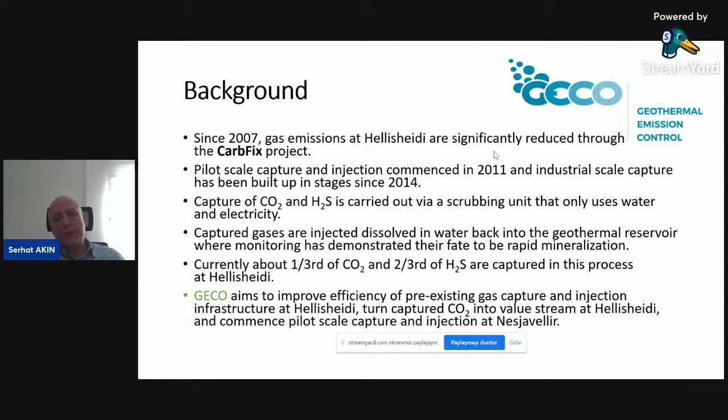The GECO project aims to improve the efficiency of this pre-existing gas capture and injection infrastructure at Hellisheiði, turn captured carbon dioxide into a value stream at Hellisheiði, and commence pilot scale capture and injection at Nesjavellir power plant. As part of GECO, we aim to expand this process to different types of geothermal reservoirs, and the demo sites established, apart from Hellisheiði and Nesjavellir in Iceland...

...include Hveragerði, Kızıldere, and Bochum reservoirs, which are going to be used as demo sites. At the beginning, a reservoir field, Castelnuovo in Italy, had been proposed, but due to some permit problems, this was moved to an Iceland location instead.

In this particular project, we have partnered with several different companies, research institutions, and universities. There are 5 industrial and 13 research and technology development partners located in France, Italy, Spain, Norway, Turkey, Germany, United Kingdom, and Iceland. From Turkey, we are partnering with Zorlu Geothermal, and we will be demonstrating this carbon dioxide re-injection process in the Kızıldere reservoir.

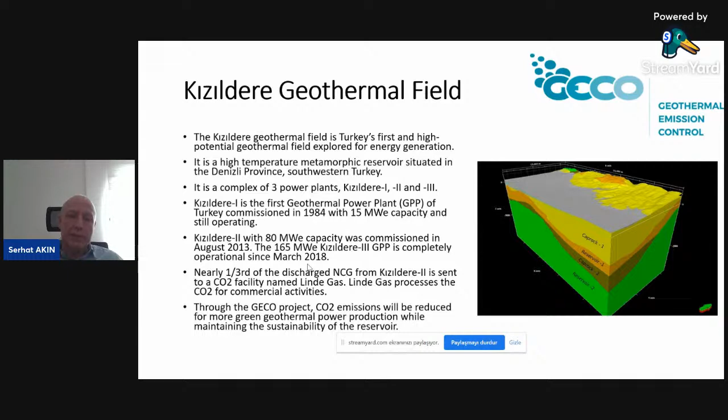Essentially, the aim of this project is to further reduce emissions so that we have greener geothermal power production, while maintaining the sustainability of reservoir production. So let's talk about how we're going to achieve this.

The idea is to use a mixture of water and non-condensable gas that we will inject at the surface through the casing. This will be injected from this particular injection well right over here.

We are hoping that as we inject this NCG back into the reservoir, it will mineralize the whole thing, creating some carbonate minerals. I will later talk about what sort of minerals we are expecting to precipitate through the injection.

As you see over here, we have a couple of neighbor production wells, and those will be subject to increased carbon dioxide injection.

Through the project, we will also be monitoring the content of the produced carbon dioxide at the production wells, and we will be monitoring the surface CO2 soil flux.

This is what we call a conceptual model of the whole process, and we will see what sort of minerals we will precipitate through modeling.

We have conducted several different levels of modeling. We have created a geological model, a conceptual model, and we have also developed a couple of reservoir simulation models.

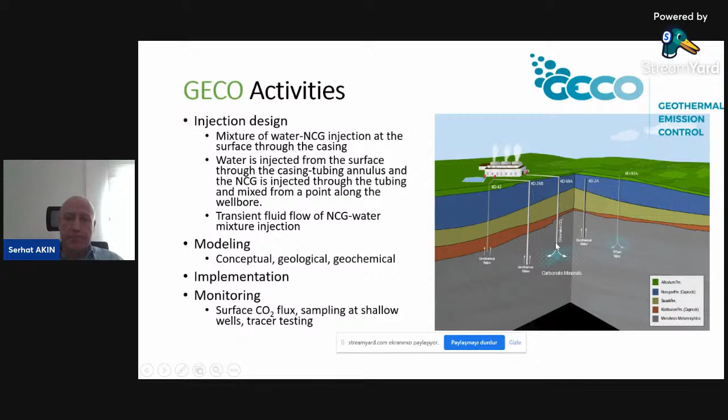What we have done is create some simulation models. These are wellbore models. We have used PipeSim and Olga. PipeSim is a steady state model, whereas Olga is a transient model.

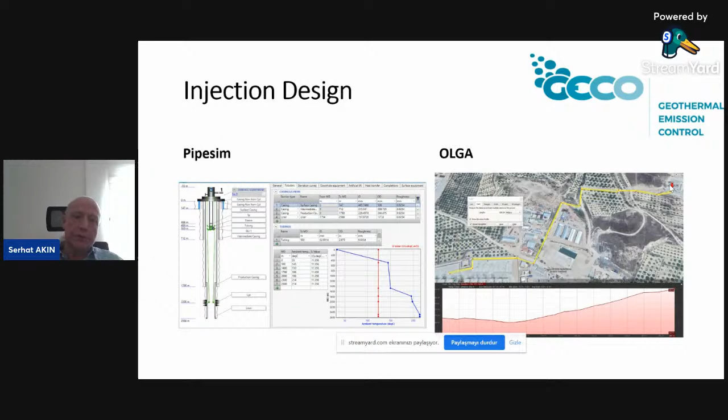We have simulated the injection process from the start of this particular location to the injection well and at the bottom hole conditions. This is showing a couple of sensitivity analyses we have carried out for different water injection rates and different gas injection rates.

As you see, as the injected brine amount increases together with the gas, we observe an increased flowing pressure.

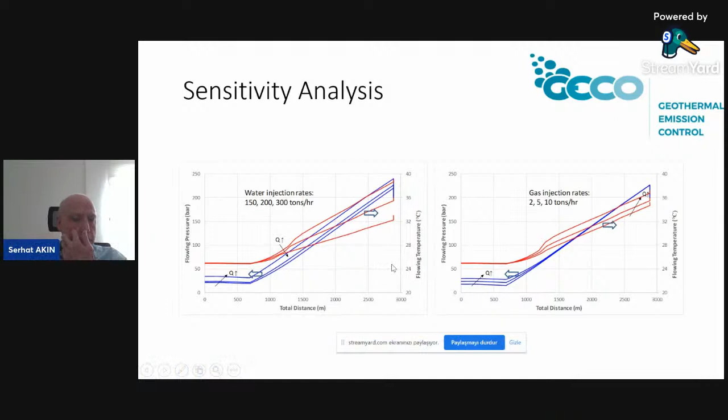This means we would require additional pumping or compressor efficiency power to pump these things over here. Another thing is that it will be affecting the injected water as the system goes towards the bottom of the location.

These simulations are conducted using what we call the PipeSim software. We have studied the flow regime as the injection commences from the power plant location to the bottom of the well, indicated at the right-hand side of the plots right here.

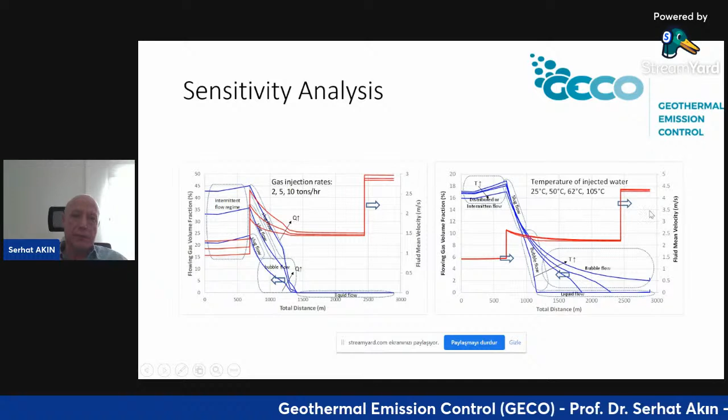For a couple of sensitivity runs, we have seen that at locations between the power plant and injection well, we see intermittent flow regime, and then slug flow for differing injection of carbon dioxide values. At certain locations, we also observe bubble flow.

The importance of this is that at certain locations, we have pipelines shaped like an omega. The reason why this omega shape is present in this section is to allow vehicles to pass through the roads present in the field. So at these locations, we don't want problematic high-pressure carbon dioxide slugs, and we will be observing this if we have higher injection rates at certain locations.

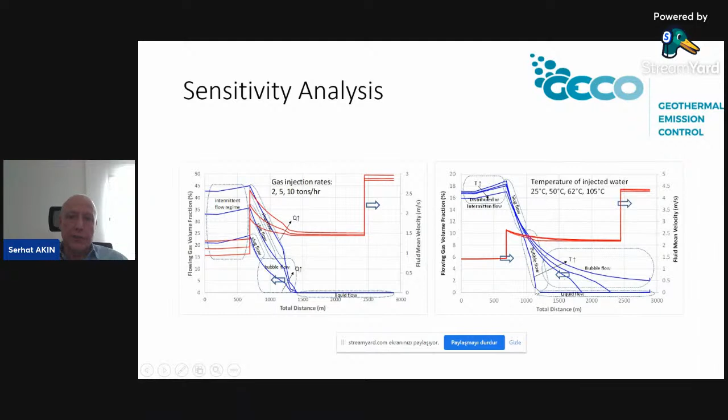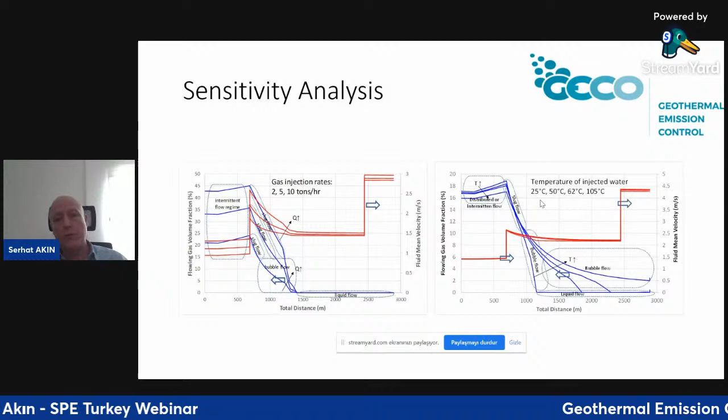Another thing is that if we continue further with upstream locations, as we decrease the injection temperature, we will see less and less bubble flow. That's particularly important, meaning that if we directly mix the NCG or carbon dioxide into the re-injection water, it will be somewhat problematic compared to a case where we have colder water injection. That's why we've opted to use colder water for injection.

Once we modeled and obtained these parameters, we extended our research into modeling. The modeling consists of geological modeling and some large-scale computer models, including a full-scale field model shown at the top. But solving such models is problematic because of runtime, especially when you have reactive transport, and if you're using advanced programs like TOUGHREACT, you'll have problems with convergence. If we use a model with several thousand grid blocks, due to the presence of NCGs and the reactive transport equations, we get certain convergence problems.

That's why we opted to use a sector model with this pilot injection well plus the surrounding neighbor production wells only. This is a much more detailed, much smaller model that can be easily used to model this transport and the geothermal or geochemical interactions that occur as we proceed with injection. The problem here is that if you extract such a small sector model from a large field model, you have to implement boundary conditions at the edges of the reservoir.

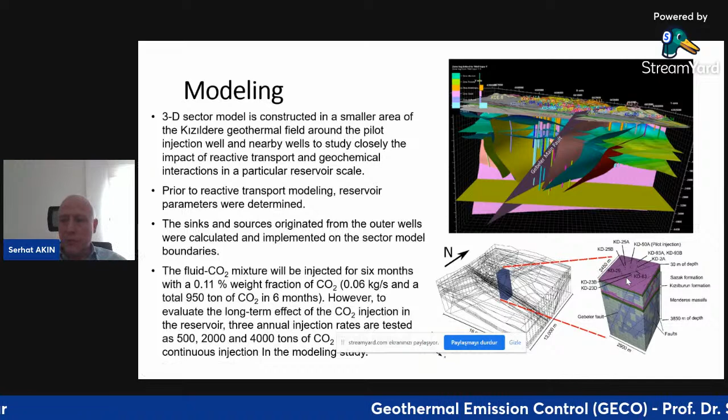The rest would be right over here: the carbon dioxide injection fluid mixture will be injected for 6 months, and we're interested in the long-term effects of the whole thing.

We have a very detailed geological model, as you see here. This model is created in software called Petrasim, which is coupled with TOUGH. We've implemented all geological features and all wells used for injection, monitoring, and other purposes here.

As mentioned, we extracted a sector model from this large-scale field model. The field model, even though it has permeability values, porosity values, and other data used to populate it, has to be refined so this sector model can be used. What we did is use an analogy from outcrop rocks present at a marble location we obtained. We used image analysis techniques and also implemented mud-loss data and sensitivity analysis of temperature and pressure carried out for this sector model.

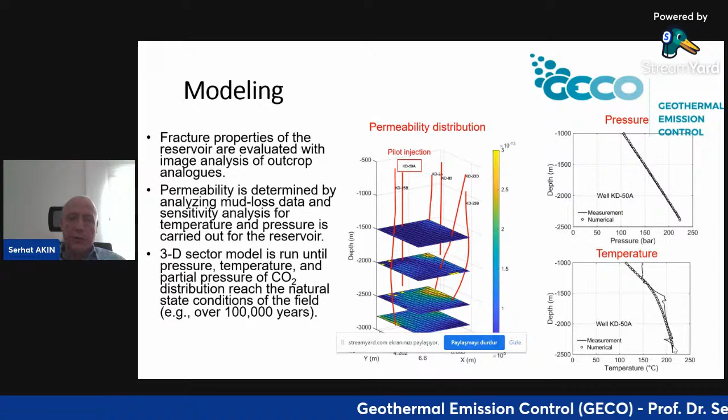At the same time, we also check the temperatures here, and likewise repeat the same thing for the carbon dioxide. Since carbon dioxide is only measured at the wellhead for production, we only use point values of carbon dioxide measurements. Once we're satisfied with a match, we proceed with what we call the reactive transport.

Compared to original CarbFix projects carried out in basaltic Icelandic geothermal reservoirs, the mineralization process of carbon dioxide in the schist and marble reservoirs of the Kızıldere field will be limited, basically because of the initial high carbon dioxide mass fraction. So here we are injecting a carbon dioxide mixture that is much less than the carbon dioxide already present in the reservoir, meaning the reservoir minerals are already equilibrated with large amounts of carbon dioxide, and that's why the injected carbon dioxide does not undergo any significant mineralization process.

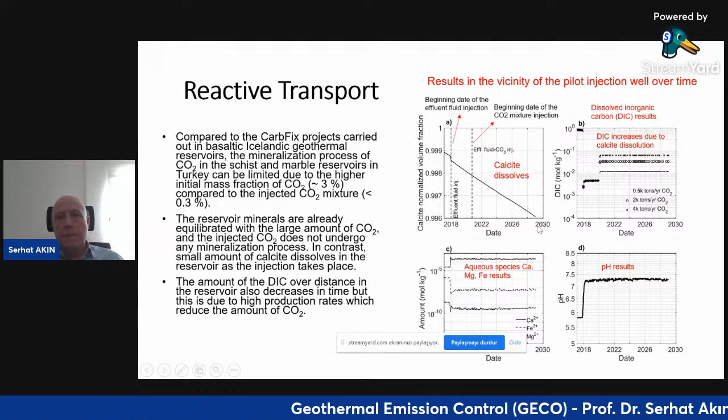In contrast, only small amounts of calcite dissolve in the reservoir as the injection goes on, as you see, for several years. We have also checked out other minerals, and several other things are considered, like pH, aqueous species such as calcium, magnesium, and iron. We have also checked dissolved inorganic carbon as well.

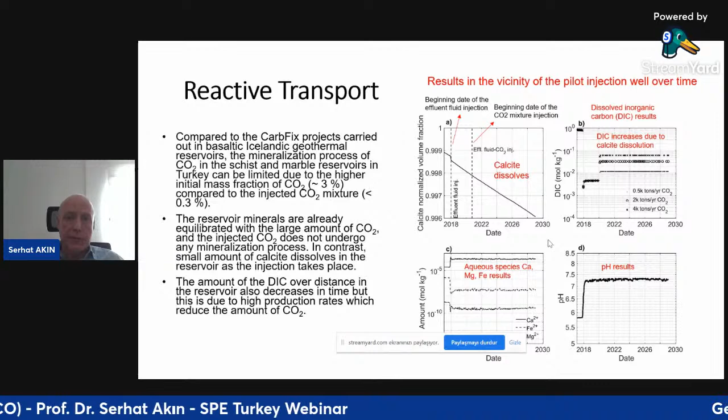So over here, we carried out some sensitivity runs so that we would be getting logical answers as a result of this particular reactive transport model. We would also be tracing the injected carbon dioxide.

So how is it going to be implemented? As I mentioned, mixing the NCG, which mainly consists of carbon dioxide, in colder water is advantageous. If we directly mix this NCG in the reinjection line, which is approximately at 120 degrees or somewhat less, it will be disadvantageous. That's why we will be mixing the NCG prior to injection in water which we collect from a bypass pond.

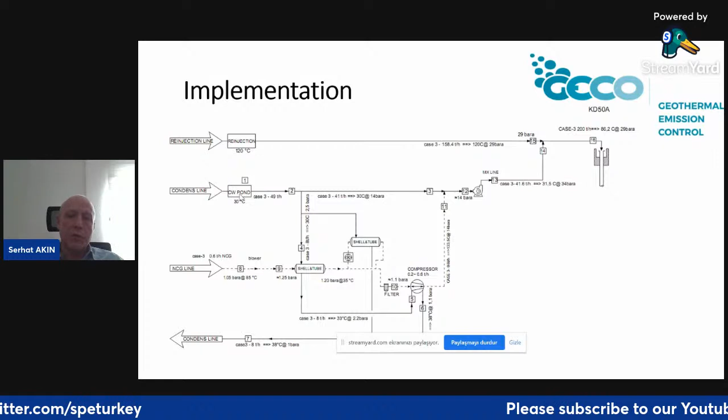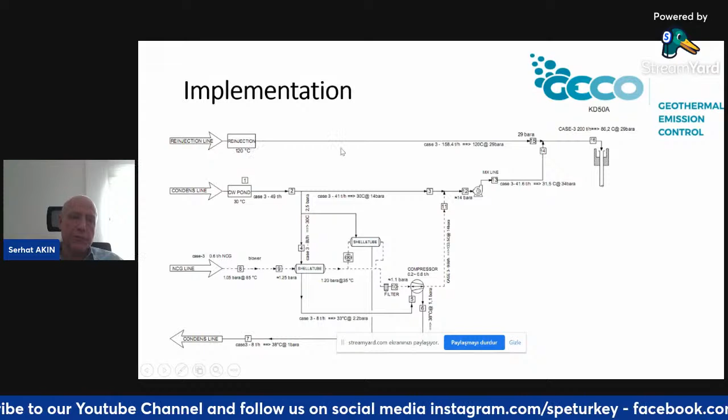Most of the geothermal power plants in Turkey have a bypass pond. So in case of some emergency or problem, what you do is just bypass the power plant and move the produced brine to the pond. The temperature of the pond is somewhat lower compared to the reinjection water.

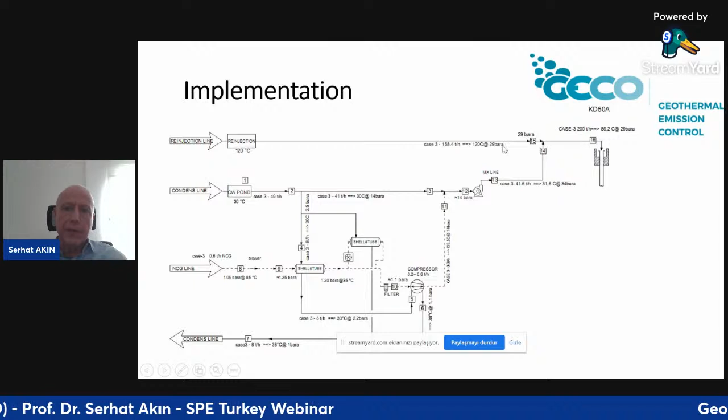That's why we will have increased solubility of the NCG inside this colder brine that has already been produced. So what we are going to do is take the NCG, capture it without doing anything, and then pass it through a shell and tube so that we cool it to a certain temperature, like 35 degrees. Then we use a compressor, and mix it with this pond water, which is approximately at 30 degrees. Of course this will change seasonally. Then we use a compressor over here, mix it with the reinjection line, and since this reinjection line is already at a certain pressure, it will be carried together with the brine, and then we will be injecting it at the well top.

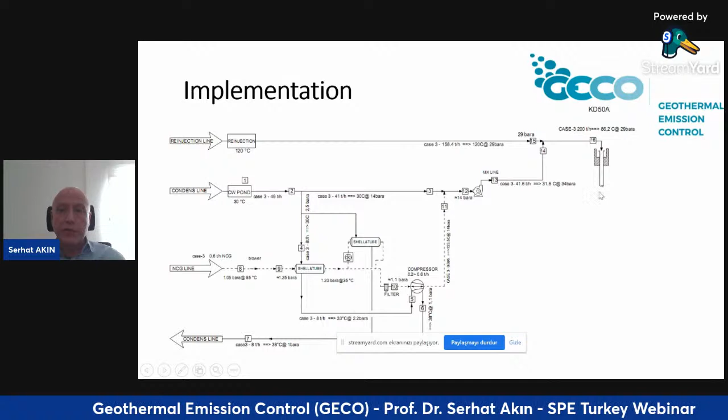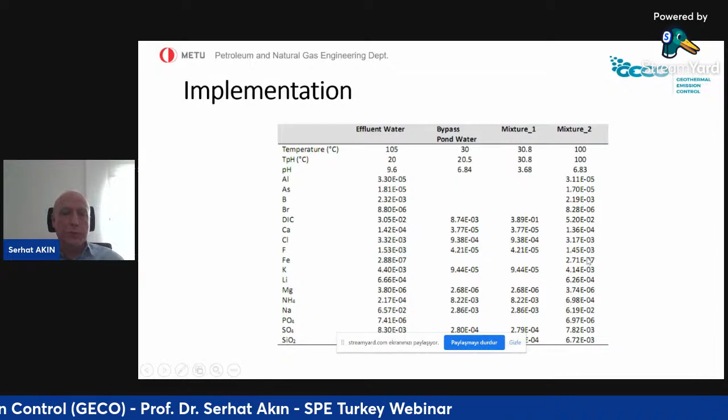So we have checked the following composition. This is from the effluent water. This is the composition we obtained at the bypass pond water, and we have calculated mixture 1 and mixture 2, which are two different locations at certain positions in the injection system. We know how much calcium, chloride, iron, and other elements will be changing prior to injection.

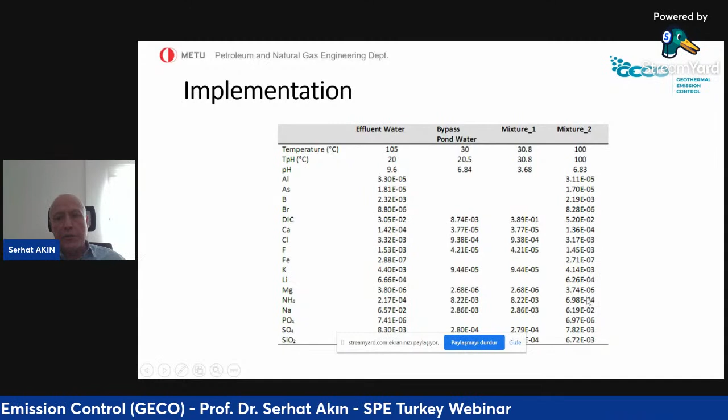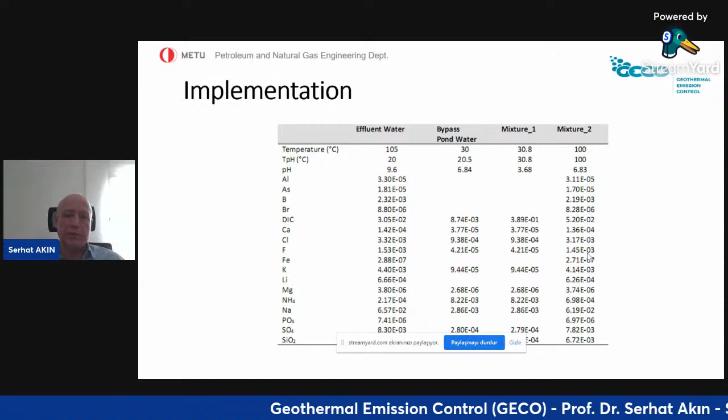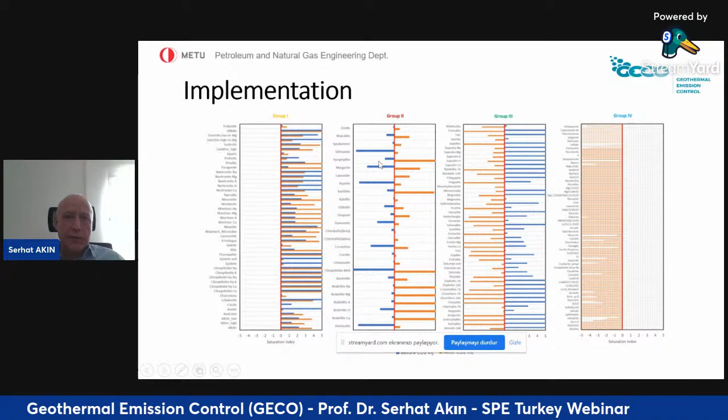This is quite important, because in order to model the whole process accurately, we need to have an idea about the injected composition—by composition I mean the mineral composition. What we do is we have observed several minerals that we have grouped into 4 different parts, and we will be checking out each of these minerals prior to injection and after injection.

Basically, these are before and after carbon dioxide injection. For example, this group of minerals will not be seen after injection, but some of these minerals will be seen before and after injection as well. So depending on these, we have created a model.

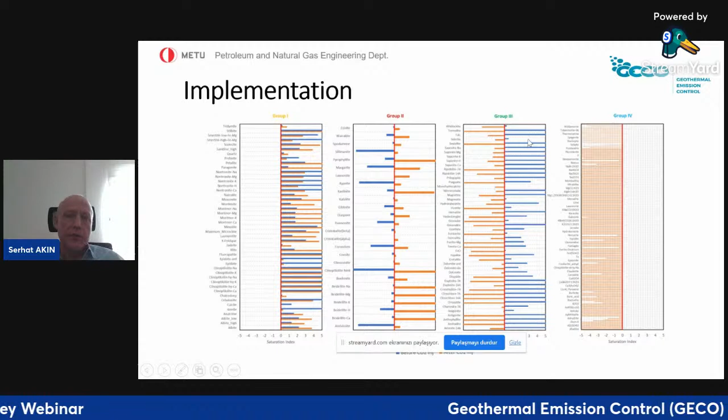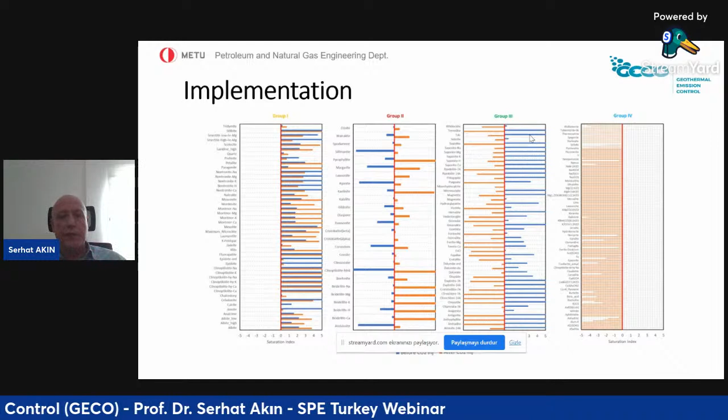We created and calibrated this model using a simulator called React, and then we modeled the injection over here. We saw that if we mix it with the background water, the brine we collect from the bypass pond, we will be changing the injection water as you see right over here. We have identified each of these minerals, and we will be checking the values later on at the monitoring stage.

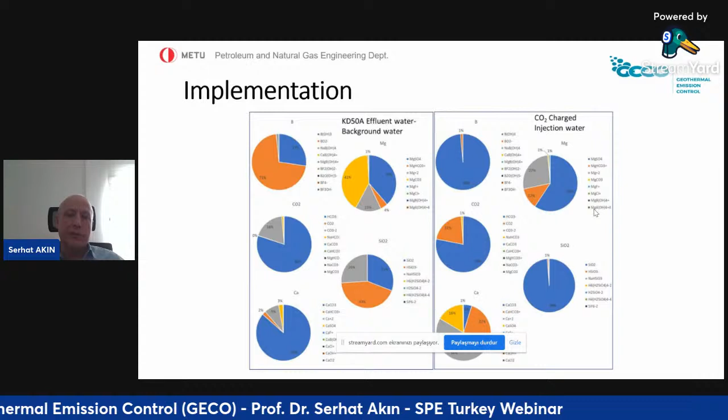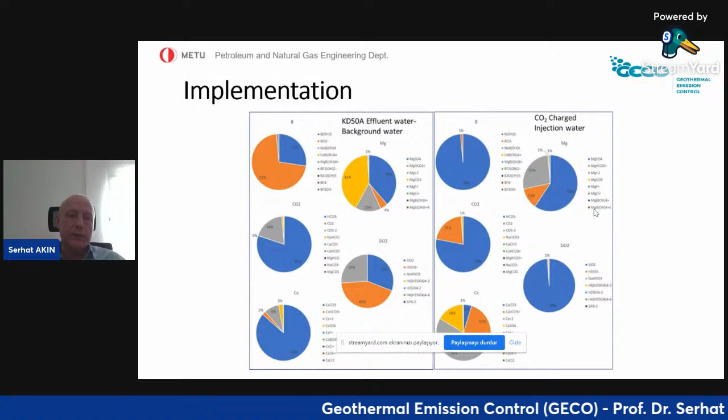By sampling the brines we produce from the production wells and at the injection well as well, we will continuously monitor these values, and then change the injected amounts in our simulation model. Apart from that, we have conducted several monitoring studies.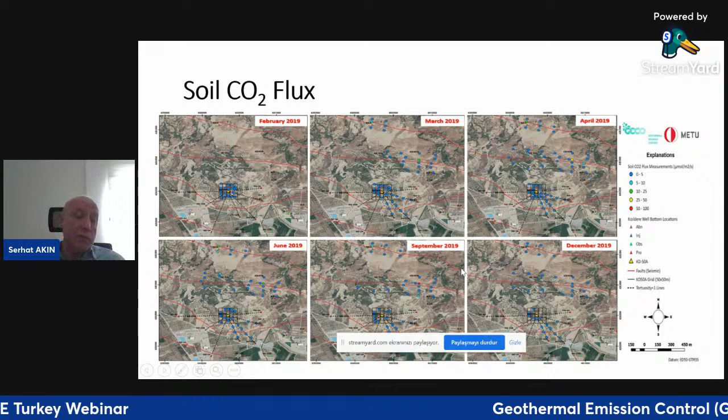These are the heights near the horst section of the graben. We don't have anything at all at the center, you see. We only have increased activity at certain times, and these are maybe related to some irrigational activities or even some different things later on.

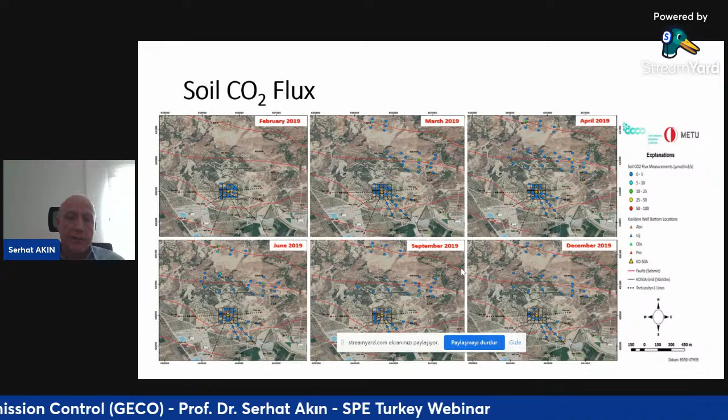We will be monitoring some satellite data to see whether these are related to irrigation or not. So this is the result that we obtained - this is the soil CO2 flux measurement. We certainly see some sort of trend, the seasonal trend is obvious right over here.

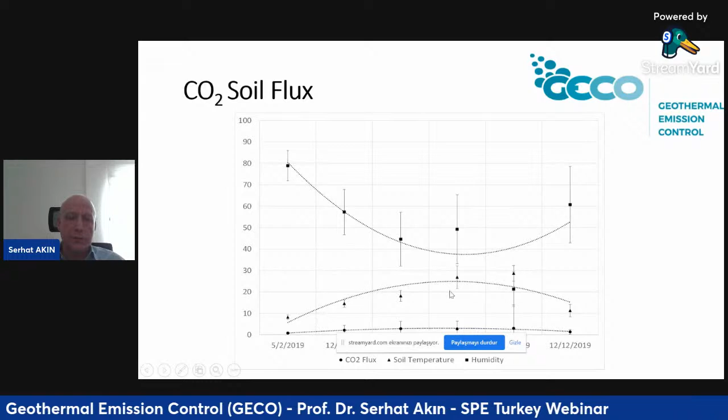Essentially, we have a negative relation with humidity and a positive relation with soil temperature over here. As soil temperature increases, as you see, we will have a carbon dioxide flux increase as well. But on the other hand, we have a negative effect of humidity.

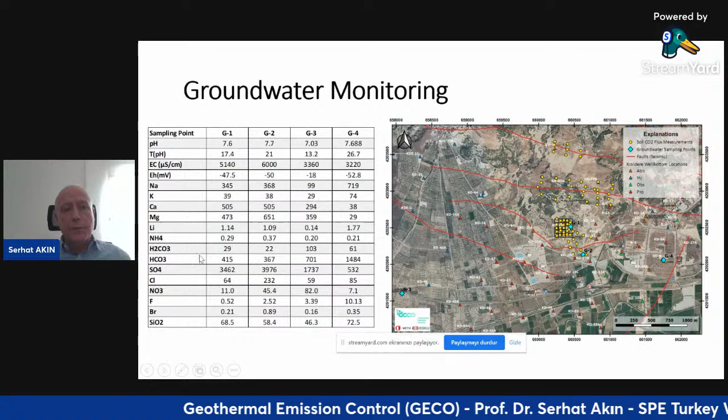We are also monitoring shallow water wells. These blue dots right over here represent the locations of shallow groundwater wells. We are continuously monitoring these values so that we will be aware whenever any unexpected carbon dioxide movement occurs. We should see some differences in, for example, bicarbonate values, and depending on the values, we will decide whether the carbon dioxide has reached that particular well location.

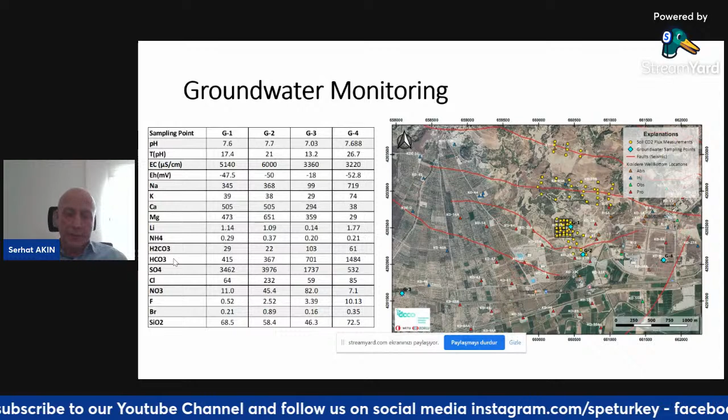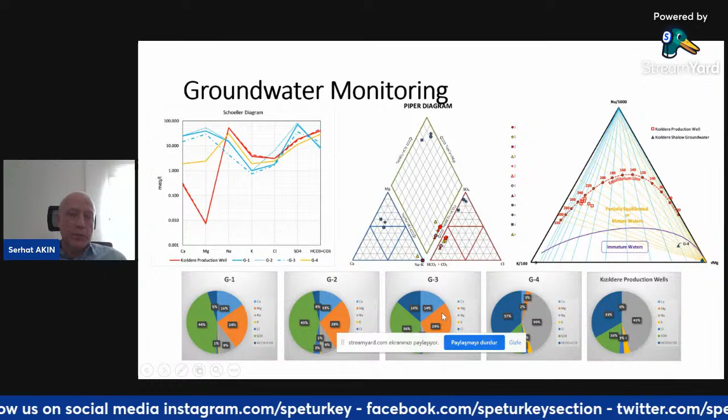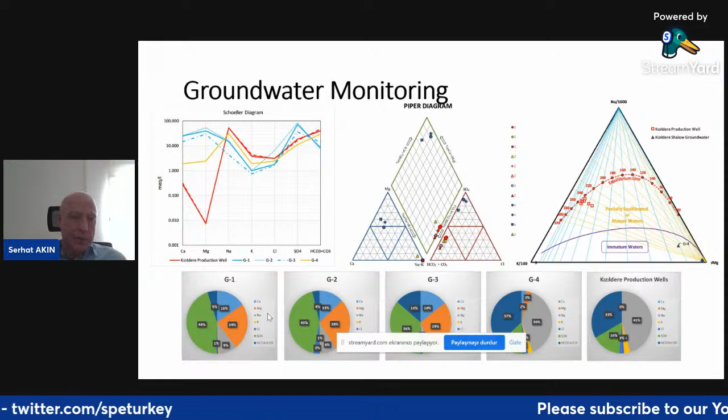These are some sample analyses that we have carried out. As I mentioned, we are continuously collecting samples, and these show that sample point 4, that well, is actually quite close to Kızıldere production wells, as you see right over here. These three wells represent the shallow waters. So essentially, if we see any difference from these mineral compositional differences, we will be saying that this has affected this particular well and so on.

So this concludes my presentation.